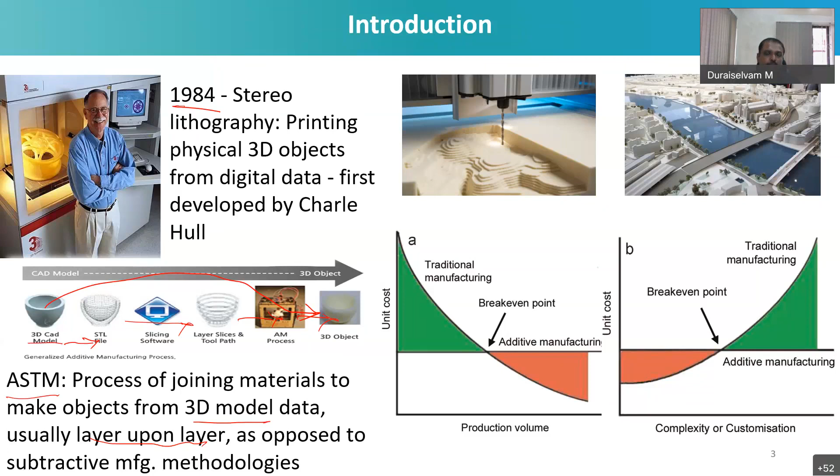And by saying that, you should not take it as a limitation, even though it is a limitation, but still 3D printing plays a vital role in realizing a prototype, and in realizing some kind of batch production. And batch production in the sense only tens or 20s of quantities is required. Beyond that, you may need to have some kind of a design change, and there is not any kind of similarity between the batch you have already processed and the batch you are right now processing. Under these circumstances, definitely mass production may not be a viable solution. Rather, you can go for 3D printing the objects. And it has, in fact, a huge cost advantage.

And when you look at that, the global market for metallic additive manufacturing for aerospace alone was $1.9 billion in 2016, and it is forecast to reach $20.9 billion, almost a 10 times increase projected by 2024 within a very short time, where other manufacturing systems or competing technologies cannot match this kind of speed.

And compare this situation in India again: almost 10 years before, you don't see a lot of industries using 3D printing systems. But in recent times in major cities, they have installed 3D printing systems, and they are serving commercial markets, more specifically automobile and aerospace. And I have also seen some applications for dental and medical, cosmetic related applications and consumer products. A lot of things they started 3D printing in recent times, and slowly the market started flourishing. And once many people started using the system, possibly you can expect a huge price reduction in terms of capital investment, and this becomes one of the important sources of doing business.

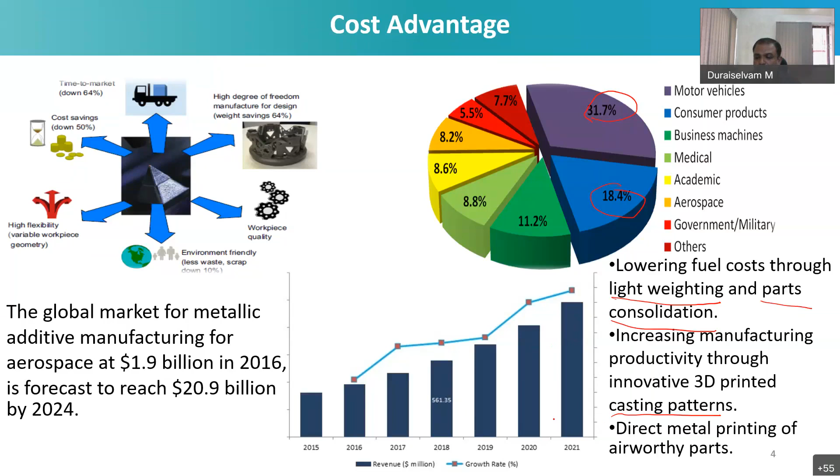Then increasing manufacturing productivity through innovative 3D printed casting patterns. So why not go for pattern production itself rather than using it for a product? Because this is a part of rapid tooling, rapid manufacturing, prototyping, where 3D printing plays a vital role. So beyond that, you can extend the 3D printing capability to rapid tooling also, where you can produce the casting which is required to produce components in mass production. Then direct metal printing of airworthy parts, that is another important thing.

So basically, when you look at any general additive manufacturing textbook or some papers, they made a lot of classifications. They come out with quite an interesting number of classifications. And today in the market, you have thousands of varieties of 3D printers dealing with different technologies. But ultimately, all these varieties can be brought under any of three categories, simply speaking. Just to give a general audience some information, I don't like to confuse them by talking more about multiple varieties like continuous fiber based 3D printing and other methods emerging in recent times. Rather, the base is how we can classify under these three different categories: liquid based, powder based, or solid based. Most 3D printing technologies may ultimately fall into one of these categories, but some may not, though the basics of operation may be similar.

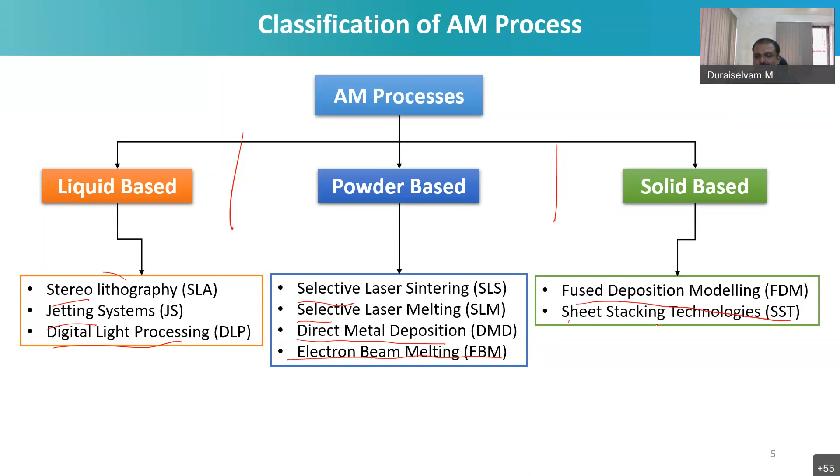Under liquid based, we'll talk about stereolithography, jetting systems, and digital light processing. Under powder based, we can talk about selective laser sintering, selective laser melting, direct metal deposition, and electron beam melting, which is recently coming up. Under solid based, we have fused deposition modeling and sheet stacking technologies. So we will look at each in brief, and when you want elaborate information, you can refer to any standard textbook, or browse the net, where you have a better possibility to understand in depth the process characteristics and other related things.

So stereolithography is basically a kind of curing technology, right? It is one of the base AM processes. As I said earlier, in 1984, Charles Hull used this process to 3D print some of the models, and stereolithography is the forefather of the 3D printing systems.

And here you'll be having some kind of photopolymer. Photopolymer is nothing but liquid thermoset resin, and being a thermoset resin, essentially it will become solid when it is exposed to some kind of light source, basically the ultraviolet laser light. So when the ultraviolet laser light is passed over that thermoset polymer, the photopolymer, the resin, what happens? It will become solidified. So the intensity or the depth of solidification depends upon the power intensity of the ultraviolet laser that is being passed on.

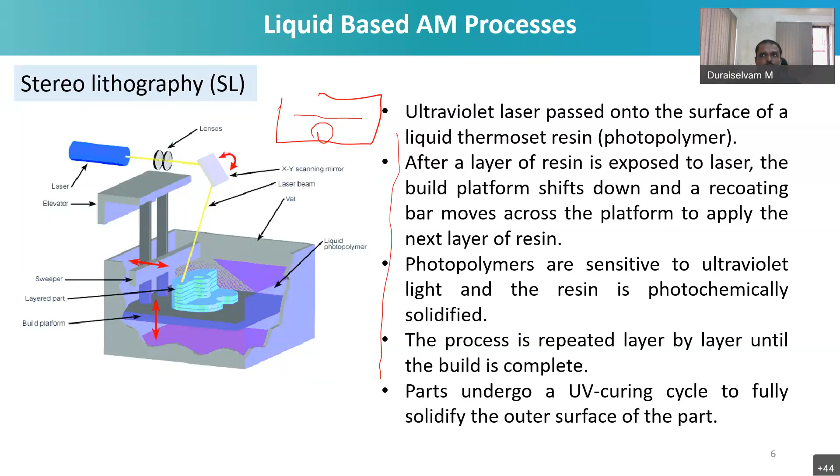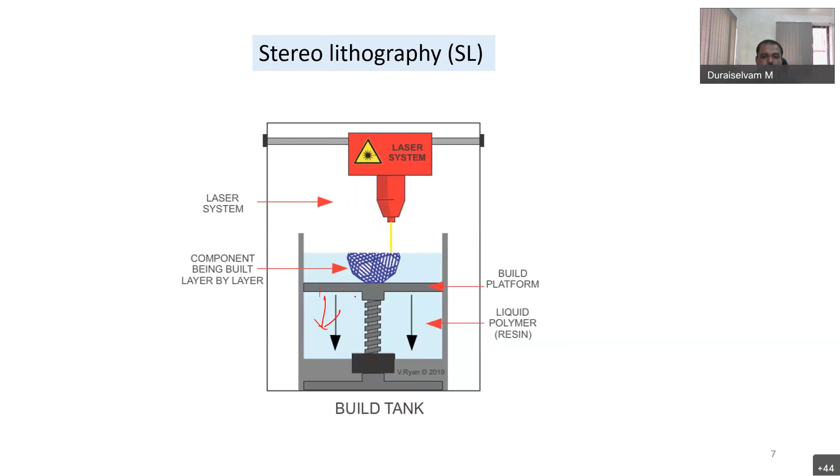So finally, some kind of curing process is also done in order to realize the entire solid material. So that's what's shown here. You can see that there is a kind of chamber in which you have a liquid photoresist polymer or resin, and the laser is passed wherever you want to solidify or realize solid material. Then you are lowering this platform one layer thickness, and then the laser follows the path, and ultimately at the end you have one finished product or a prototype.

In the jetting system, almost the same principle of photopolymer is used. Again, here we are going to use a thermoset photopolymer or resin, and rather than having a resin bath or resin chamber, here, as we have seen in an inkjet printer, it is put in drop by drop. So that is the only difference, right? So drop by drop, wherever you require the part, you put it in the form of a droplet, and immediately the droplet will get cured by the UV curing light, and then the platform is moved again to one position. And here there is a possibility to have two different heads, one head for the primary material supply and another head for the supporting material.

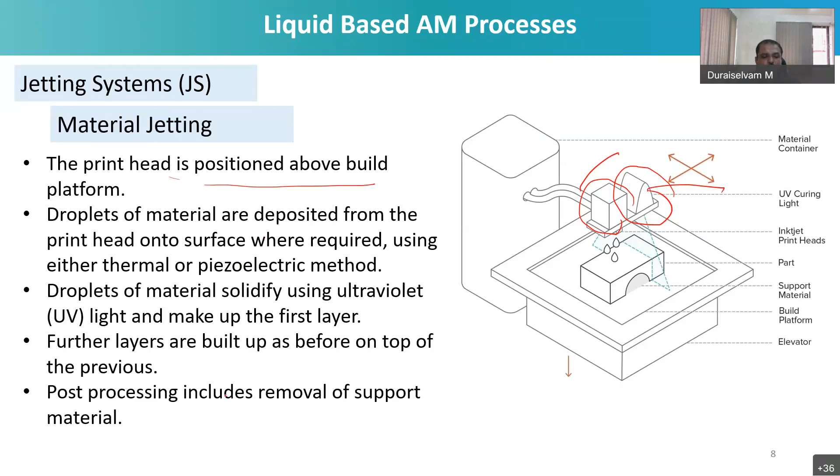So likewise, you are building layer by layer, and the droplets fall wherever you want to realize the solid material. So here the print head is positioned above the build platform, and the droplets of material are deposited from the printing head onto the surface where required, using either a thermal or piezoelectric method. Thermal is the system where you slightly melt the polymer material, and then it becomes liquefied and falls as a droplet. So the droplets of material solidify using ultraviolet light and make up the first layer. Further layers are built up as before on top of the previous. Post-processing does removal of support material. So likewise, you can build the system.

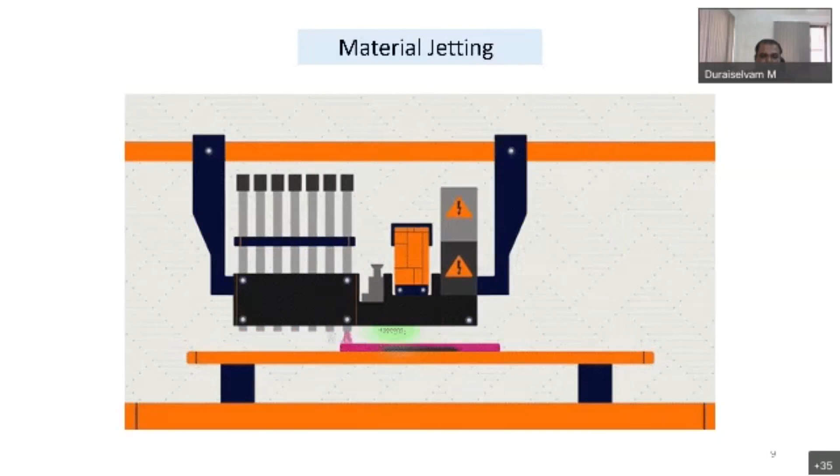So here you can see that the droplets are falling on the material wherever it's required, and in parallel the supporting material is also falling, and you have a laser system here to cure, and then finally you can realize this particular product. And binder jetting is another form of jetting system, and rather than having some kind of curing system, here no such systems are involved. Rather, you have a kind of liquid binder to bind the powder together, right?

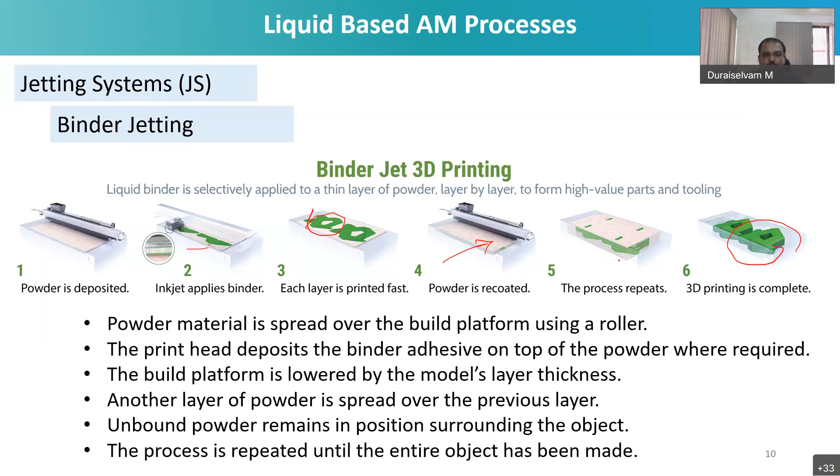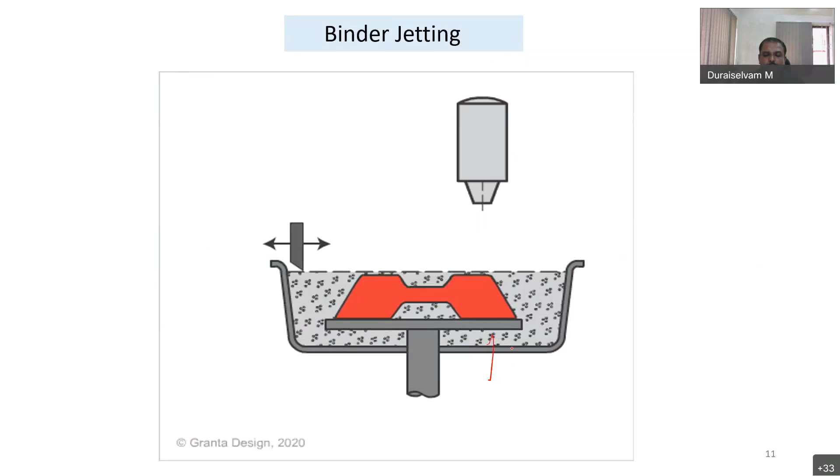So you can see the process. It's depositing powder wherever it's required, and then the binder is applied, and the table moves one step downwards in order to build the entire workpiece or component you intend to build.

And digital light processing is a little innovative process, and one of the fastest processes in the 3D printing arena, where you can realize the product at a very fast rate, as the curing rate is also extremely high. In most situations, you pass the curing media or a laser light or a binder from the top. This is completely from the bottom. So you start building from the bottom, and you normally have a resin tank here, and there is a kind of digital micromirror device.

So this is a very critical system in digital light processing, a digital micromirror, and it's a component made of thousands of micromirrors used for navigating the light being projected by the digital light projector. So you have a light source, and this light is used to cure the system, and it falls on the digital micromirrors. Then it gets focused, and then it goes to the tank area, where the bottom of the tank is transparent. It falls according to the curing strategy, what you want to cure and what you don't want to cure.

And from the build platform in the Z axis, it will get attached to the surface. Then slowly, when you are moving in the upper direction, you can build any component you want according to the light reflections you already planned. So this is one of the fastest processes, as I said earlier, and you can realize any kind of complex shapes using this digital light processing system.

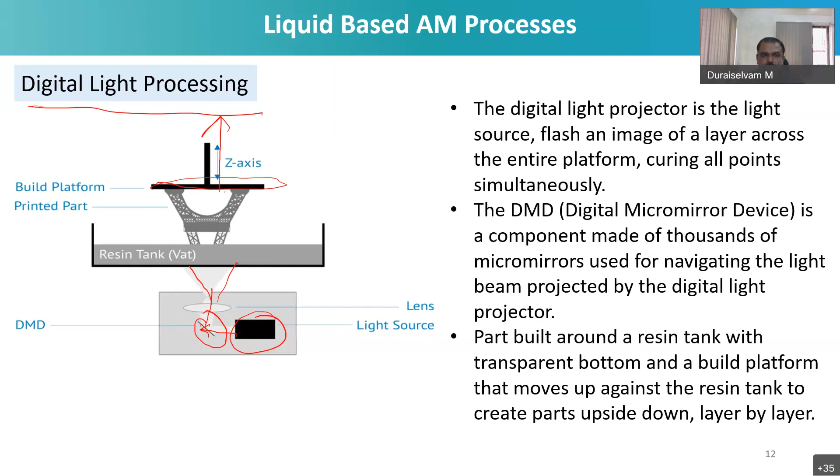And coming to powder-based additive manufacturing processes: in the earlier case, liquid-based, the starting material is in the form of liquid. So from the liquid, you are using some kind of strategy to cure the liquid into a solid form. But in the case of powder-based AM processes, the starting material is preferably in the form of a powder, right? So powder can be a composite powder or a polymer powder or a metal powder when you are talking about metal-based 3D processes.

So there is a little difference between selective laser sintering and selective laser melting. Most metal additive manufacturing systems fall under the category of SLM. SLM is selective laser melting. So you need to melt the metal powder in order to fuse it together to form a solid layer, and finally a product. And if you want to use some kind of pre-bound polymer or a ceramic or a glass particle, and just fuse the material using the laser energy, then it is more of a selective laser sintering. You are not raising the temperature to the melting point of the material, rather you are just sintering it. So sintering finally will get it fused, and just for realizing the prototype, you don't need a complete melting or solidification.

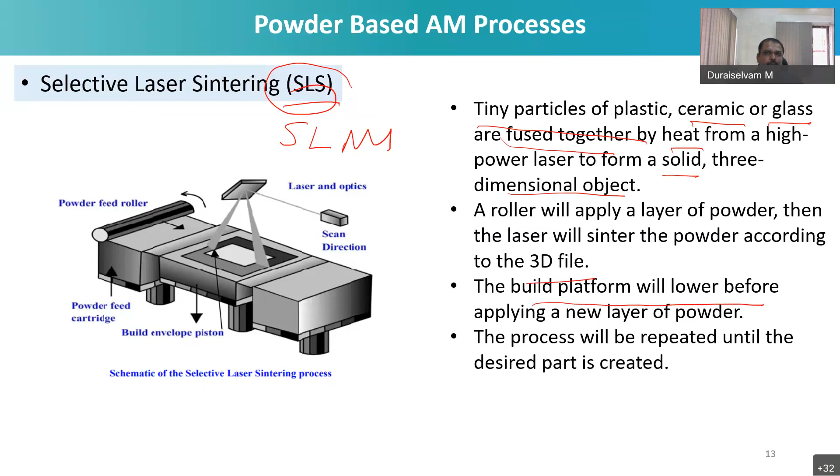And after doing that, a roller will apply a layer of powder. Then the laser will sinter the powder according to the 3D file, and the build platform will lower before applying a new layer of powder. So basically, again, it is a layer by layer deposition of the powder particle. Sintering happens, lower the powder bed by one layer thickness, then again apply the powder, lower the layer by one layer thickness, likewise it goes.

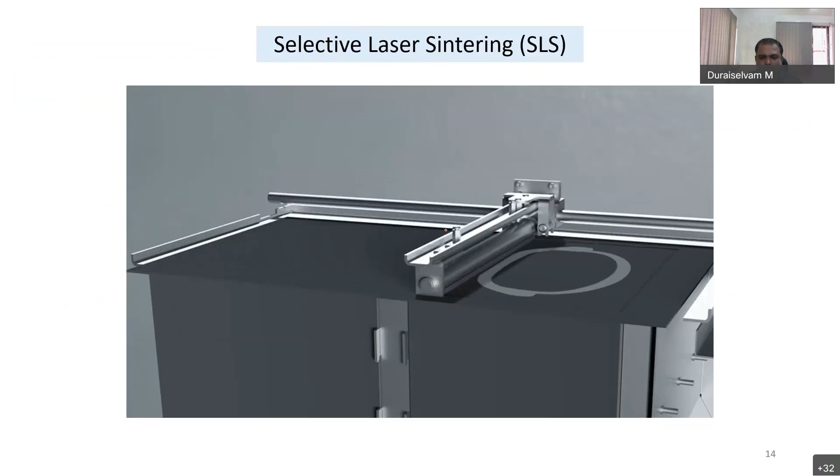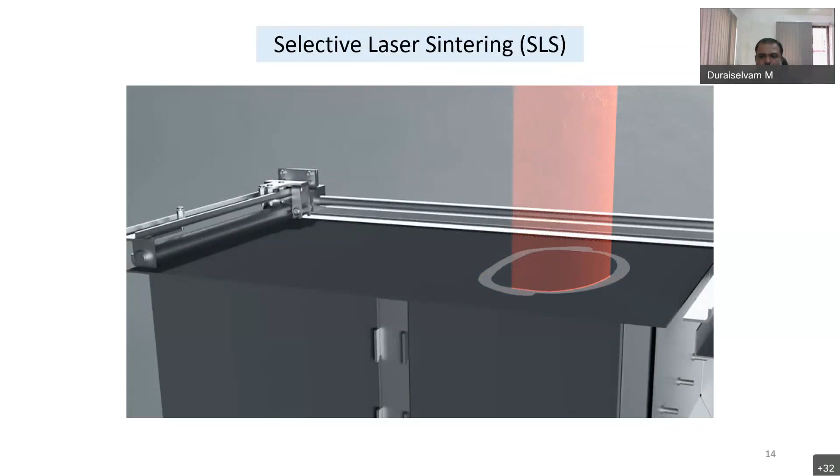So here you can see the selective sintering process: they are applying one layer of material, and the laser is sintering selectively where you wanted to realize some kind of a solid, then again it is falling on that one, and the process repeats until you build the entire component.

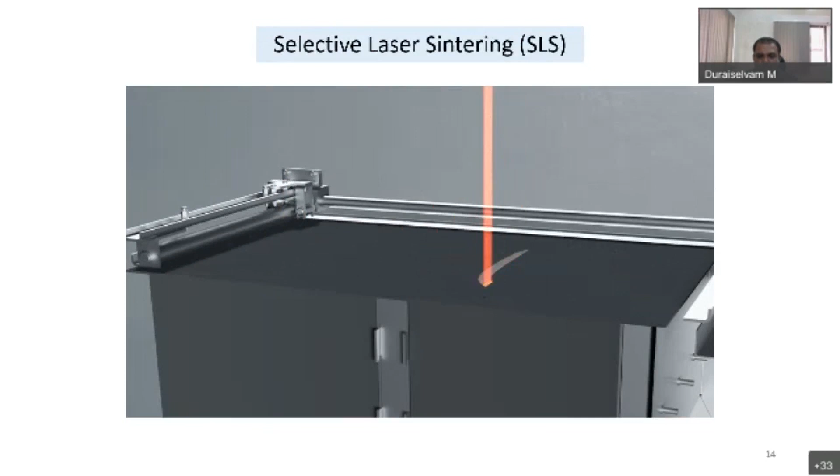And selective laser melting is a more straightforward process. You completely melt the metal powder that is lying on the bed wherever you wanted to realize the product, and then you lower the bed again and repeat the process to finally realize the entire component. That is selective laser melting. And there are a lot of other names also being used: direct metal laser melting, or laser powder bed fusion technology, or simply powder bed fusion technology.

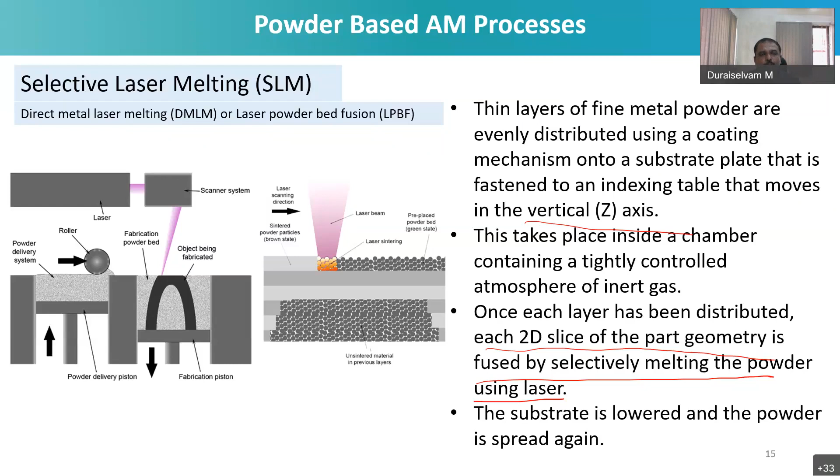product. So once each layer has been distributed, each 2D slice of the part geometry is fused by selectively melting the powder using a laser. Basically, these 3D printing systems will cover only a 2D area in the X and Y direction. And since you are lowering one by one and fusing the powder in the Z direction, finally you can realize the entire component in a 3-dimensional pattern.

And direct metal deposition is more like laser cladding, right? And if you have a coaxial powder feeding nozzle like this, whether it is a lateral or off-axis system or a continuous coaxial system, you have some kind of a powder feeding mechanism where the powder is fed into the coaxial nozzle of the laser, and the laser light will come from the middle, and then it melts the material which is meeting the already prepared layer, and then it will get deposited.

So likewise, if you mount the entire coaxial nozzle like this on a robot arm or a kind of XY gantry, and if you move that entire system in a pre-programmed manner, then finally you end up producing the entire product. Some industries have even proved they can build an entire turbine blade using this direct metal deposition based technology. So here heat is generated using a focused laser beam that is sufficient to melt the surface of the substrate to form a small melt pool, and the material is added to the melt pool using a focused powder stream or a wire feed.

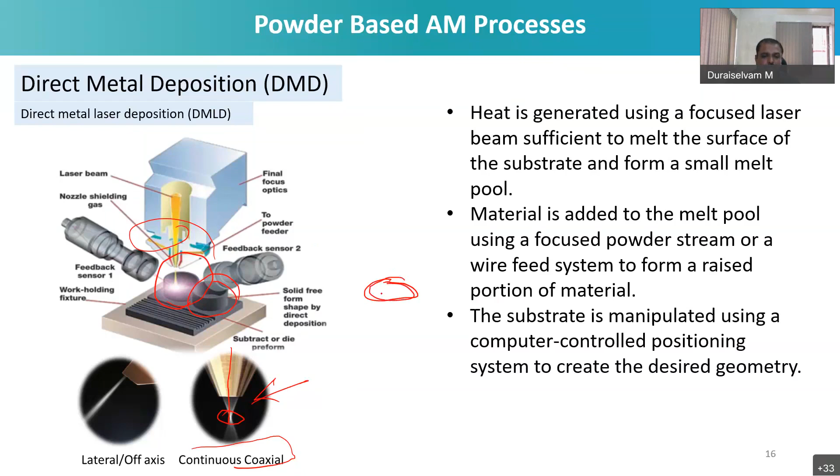Here rather than using a powder, you can use a wire feeding system also, and you can manipulate the substrate like that. Here you can see that you build a kind of cylindrical material one by one, layer by layer, and you can realize the final product. So likewise, you form one layer over another like this continuously, and you can build the entire material for the system.

And electron beam melting: the process execution strategy is almost similar to laser-based powder bed fusion technology, except that rather than using a laser for melting the powder, they are using an electron beam to melt the powder. The only advantage they expect from electron beam based systems is that the distortion levels are very, very low, because the electron beam is not a very high intensity heating system, whereas the electromagnetic radiation in the case of a laser has a huge heat content that will try to distort in certain situations.

Normally, if you print using laser based systems, that will lead to some kind of tensile residual stresses inside. You need some kind of stress relieving strategy before using it for a final product; except for that, all other processes are similar. And the electron beam system, in fact, does have a lot of difficulties in terms of beam manipulation. When you want to deflect the beam, you need to have some kind of magnetic deflection coil. But with the laser being electromagnetic radiation, you can simply move the beam by moving the mechanical system.

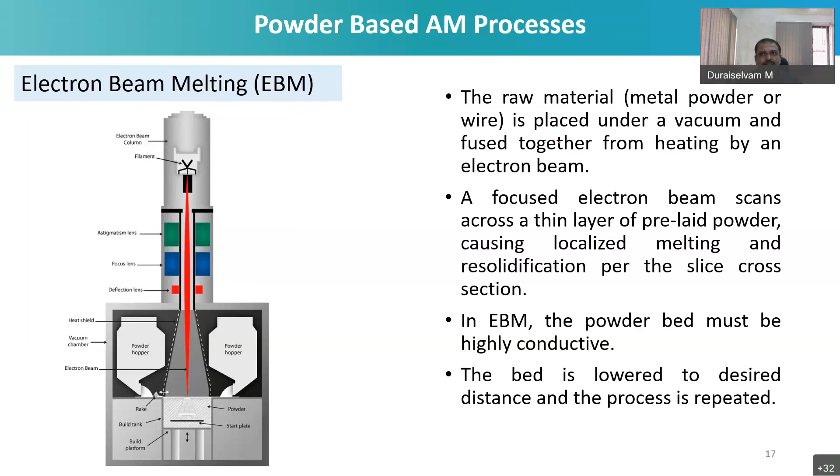So this kind of disadvantage still exists, but due to the advantage of low distortion, electron beam based systems are nowadays also picking up in the market. Here you can see the powder feeding chamber, and you have an electron gun here, a triode, which is melting wherever you want to realize the solid part. Then there is a recoater which removes the excess deposited material, then the electron beam is used to melt the material, and finally you can realize the finished product.

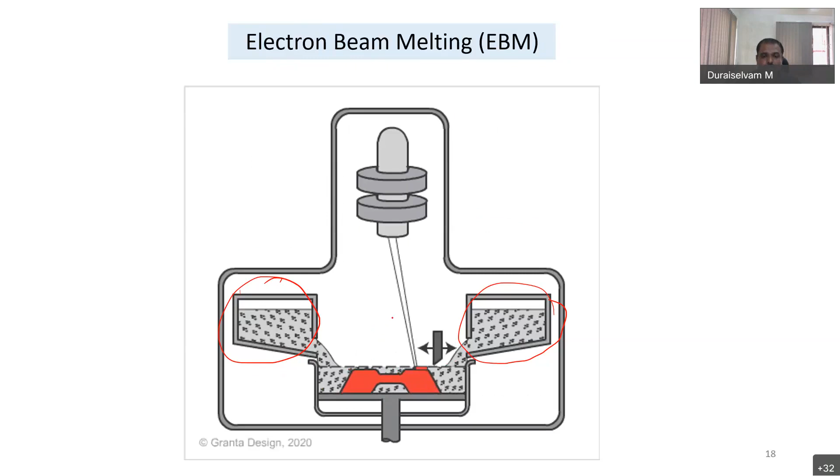So here is some comparison between electron beam and laser based 3D printing technology. Most of the things are self-explanatory, and probably in any of the textbooks you will be able to see this kind of comparison.

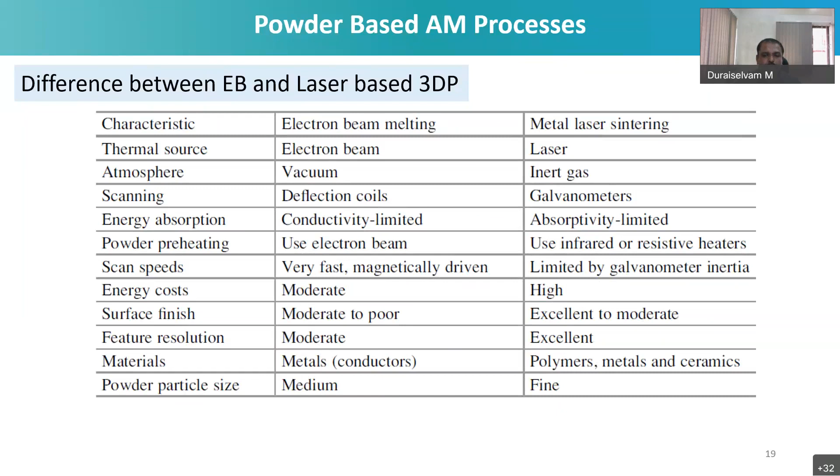Coming to solid based: in an earlier case we used liquid as a starting material. Then in a laser based system, predominantly we used either a powder or a wire. And here in solid based, they will be using purely a wire as a starting material, a kind of filament coil, and this is fused deposition modeling. We even have one FDM printer.

FDM is a widely accepted process, where you have the material in the form of a wire, and the wire is fed through a kind of extrusion head, and in the extrusion head you have a kind of heating coil. The coil will heat up the material, and then it will deposit wherever you want to deposit. Mostly the extrusion head will be moving in the XY direction, and the platform will move down in the Z direction.

Here you can see that there are two different colors. One is dark blue, another one is light blue. The dark blue is the part, and the light blue is the part support. Both can be fed simultaneously using the extrusion head, and at a time it can deposit only one, depending upon the part geometry.

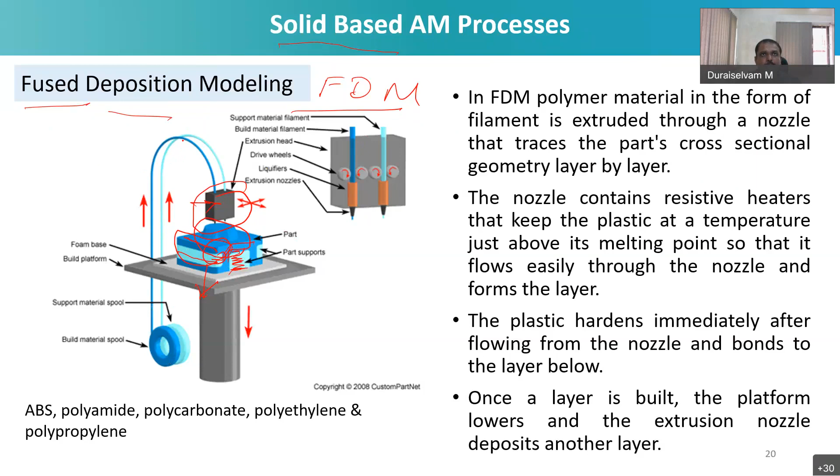So finally, you end up generating any kind of part using this particular technology. It's fused deposition because you are melting and fusing, hence the name fused deposition modeling. You can see that there is a wire feeding spool, and mostly these are all thermoplastic materials. The thermoplastic material is fed into the system, and using the heated head, it will melt and fuse layer by layer, and then the platform is lowered one layer to realize the final product.

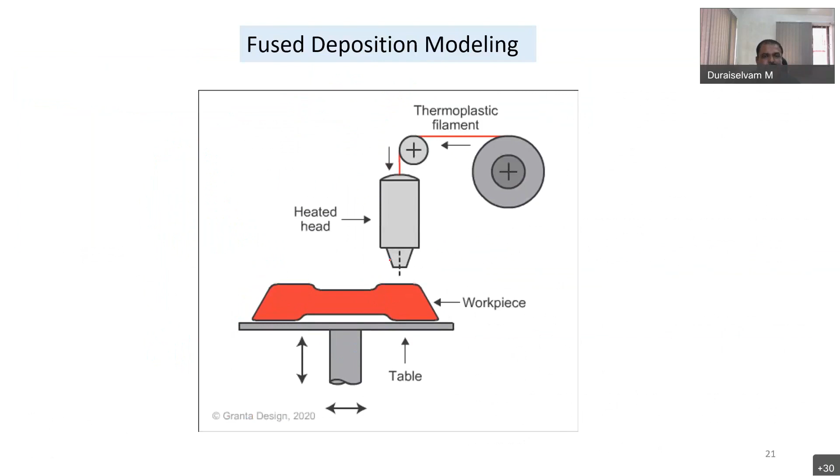Laminated object manufacturing is again a kind of technology where they use a solid-based material, the starting material preferably in the form of a sheet. And you need two components. One is sheet, another one is binder. And a laser beam is used to cure the binding material as well as to cut the excess material.

And there is a heated roller that is being used to fuse the material together, almost similar to our certificate lamination process, where you put a paper and above that one bottom and one top layer of polymer material that is heated up and then it is fused together.

So here the sheet is adhering to the substrate with a heated roller, and the laser traces the desired dimensions of the prototype, and the laser cross hatches the non-part area to facilitate waste removal. So this is the part area, and the rest of the area is non-part area. So you can cross hatch so that it can be removed easily.

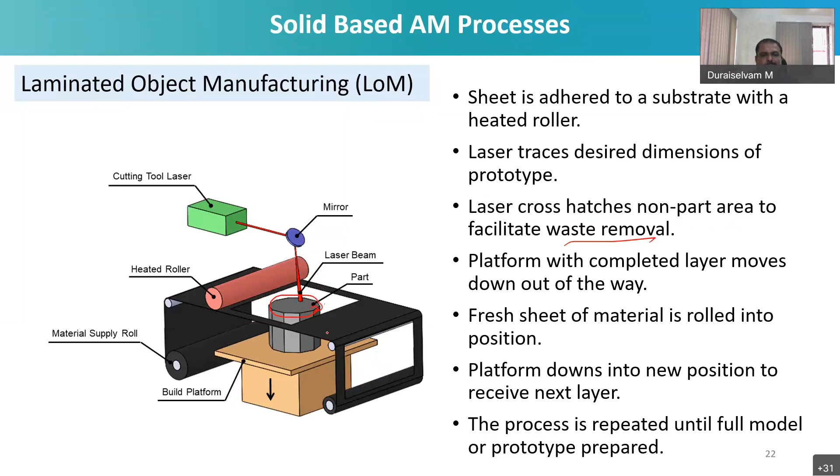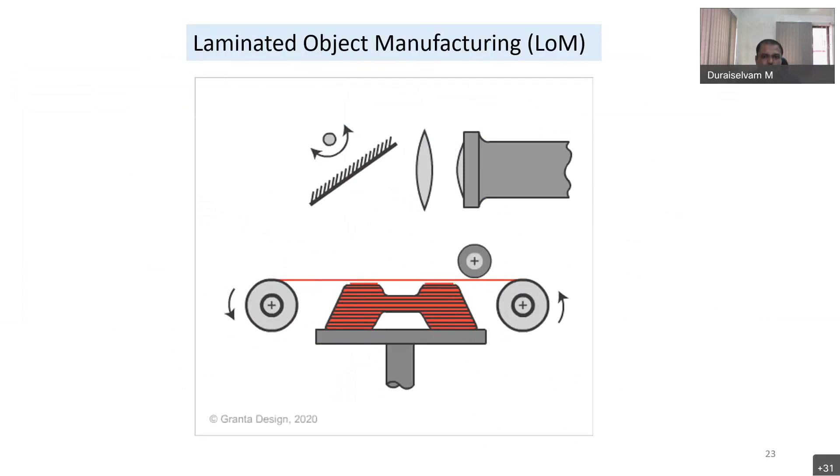Again, the roller makes one movement, and then the heated roller also rolls over the surface. Likewise, the process repeats to realize the final product. So that is about the laminated object manufacturing. So this is very brief information about the classification of additive manufacturing systems: either liquid based, powder based, or solid based.

And we look at some of the applications in different verticals. Aerospace, where some of the components are very unique. Some of the components need a lot of improvement in terms of reliability, and you don't need some products in bulk, and some of the parts where you can better improve the performance. So under these cases, the aerospace industry's demand for additive manufacturing systems is ever rising.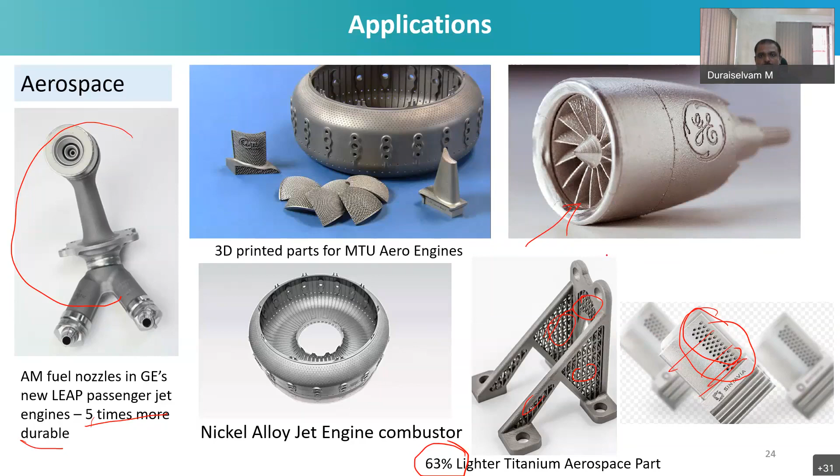And this is one prototype of GE, where they have printed the entire turbine, a working assembly itself. And they proved that it is possible to print the entire turbine with complete integration of all the different stages, and it's ready for use, a kind of system which is very futuristic, and such a system is highly demanded in industries in recent times.

And in medical, you have a lot of interesting applications coming in. One of the major applications is printing implants. Implant printing is very, very demanding in the medical industry, as most of the requirements for implants are unique. No two human beings have the same kind of bone structure; even though the skeletal topography or the dimensions will be the same, there will be a lot of difference in terms of the appearance, in terms of the kind of system available with every human being.

So when you want to prepare an implant, just a kind of rod to treat an orthopedic kind of injury, then no problem. But a hip replacement or a dental implant needs to be produced uniquely for the patient. In such circumstances, you use a scanning system to exactly map the dimensions of the particular patient. Then that can be imported into a 3D model, and finally realized in the form of a 3D printed product.

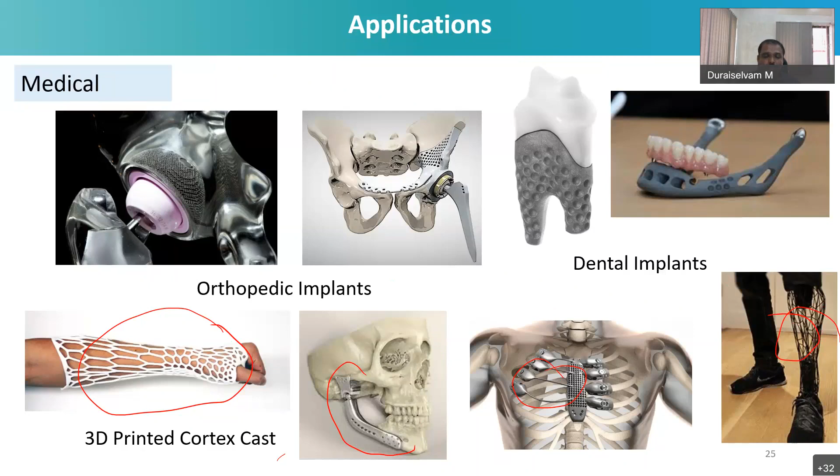So here you can see some orthopedic implants and dental implants, and the 3D printed cortex cast. Earlier, we may have used plaster of Paris whenever we wanted to heal a broken bone. But nowadays, without losing the strength, and with a lot of aesthetic look, you can prepare this kind of cortex to cure broken bones, and a jaw implant, the ribs of the bone, or even prosthetic implants, very, very lightweight. Here you can see it's a kind of network structure, simply connected with wires or something, but it has huge strength.

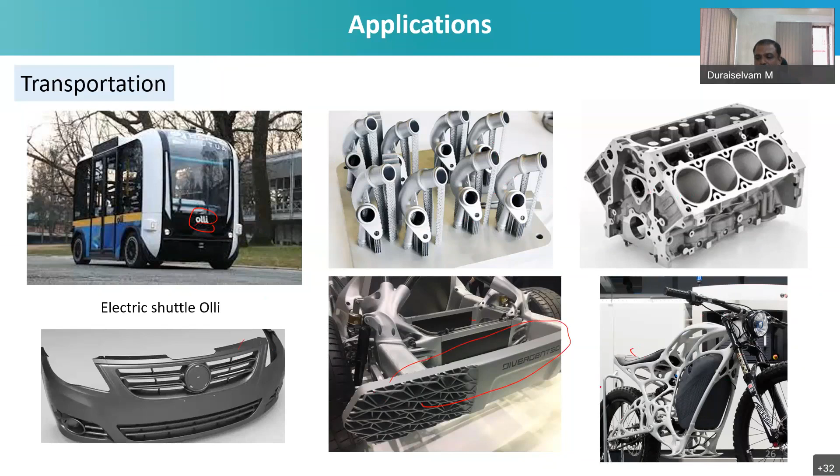In transportation, you have a lot of interesting applications. Here it is an electric shuttle, OLLI. It's completely 3D printed, a demonstration of an e-vehicle that is printed completely. And this is another demonstration of mass production, batch production, where you can produce a number of systems with complicated curves, flanges, everything together you can print. You can even print an engine block, a front panel, or even an entire chassis of a bike; something like that you can innovatively think about.

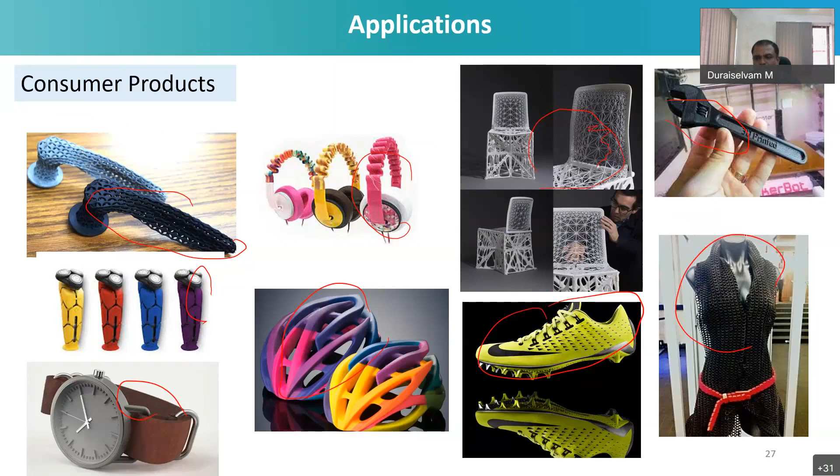And depending upon the size of your head, you can print the helmet, because sometimes we sacrifice on sizes and go with some closely matching size. But with 3D printing, you can print exactly your head size. Similarly, with 3D printed shoes, you can print exactly your foot size. When you go to a chappal shop or a footwear shop, you have numbers like 6, 7, 8. If your foot dimension is 6.5, you need to go for 7. If it is 7.1, you need to go with either 7 or 8. So you have to make some kind of sacrifice. Rather, you can print the shoe to exactly match your requirement. And 3D printed clothes are also coming up according to your needs.

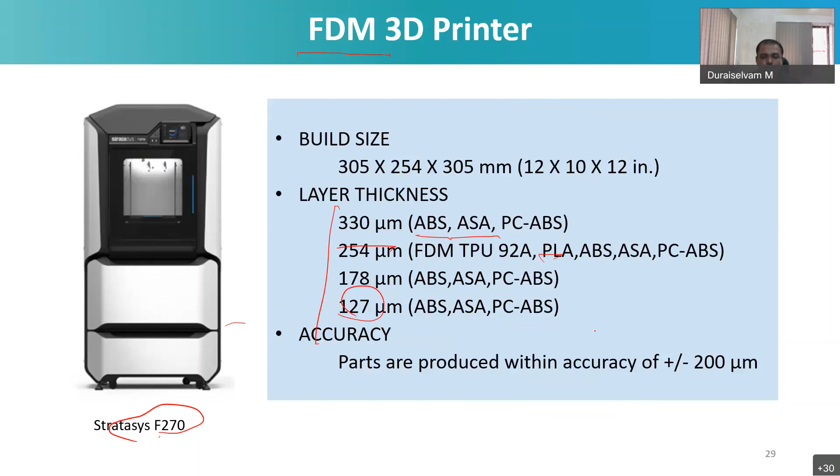And the accuracy of part production is plus or minus 200 microns. And these are some of the 3D printed parts that we have done using our FDM printer.

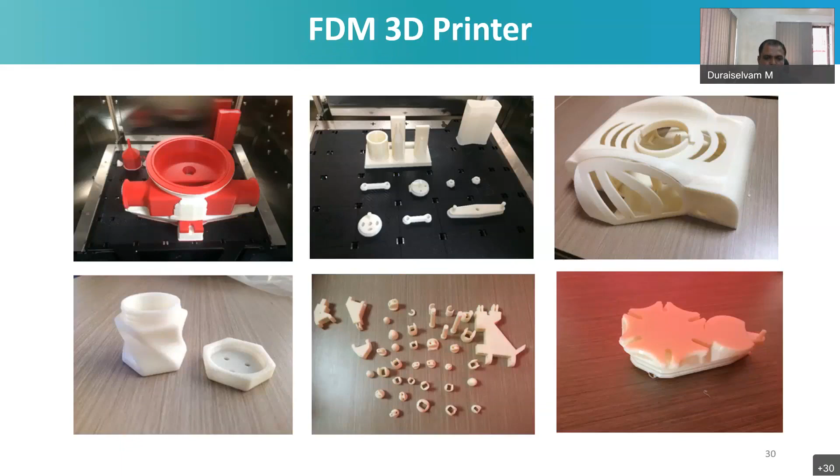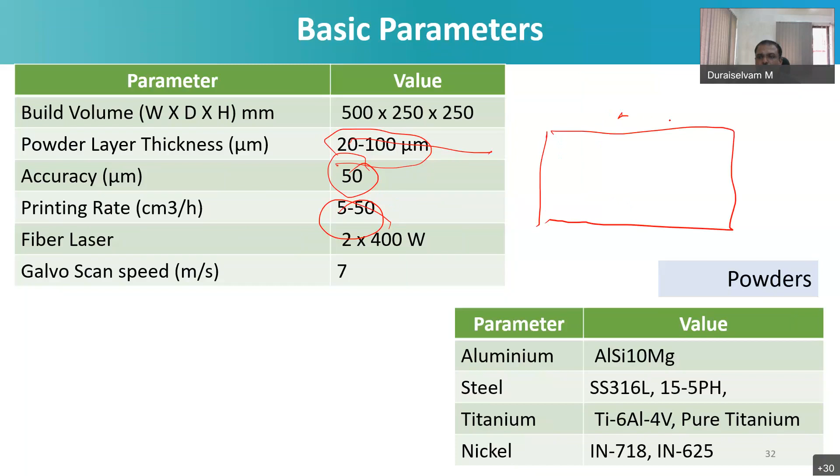And actually it's a twin laser system. Why we went for a twin laser system is the productivity can be entirely doubled. For example, when you look here, this is the build platform, and this is 500 mm, and this 500 mm is divided into 2 portions, and one laser will cover this portion and another laser will cover this portion. And if you have a big part covering the entire build area, both the lasers will simultaneously operate and print the entire part.

And if you have a number of small parts, some parts you can locate here, some parts you can locate here, so that you can simultaneously print in order to save printing time, because most of the time the printing speeds are very slow, and you need to use this kind of strategy in order to improve the printing capability.

And basically, the movement of the laser beam is controlled by galvo scanning, and you can go up to 7 meters per second. It's fixed actually. It's a fiber laser system, twin laser. And multiple materials are possible with our printer.

For aluminum alloy, we have aluminum silicon 10 magnesium. Steel, we have 316L and 15-5 PH. Titanium, the titanium grade 5, it's a medical grade actually, titanium 6 aluminum 4 vanadium, and we have pure titanium also. And under the Inconel alloys, we have Inconel 718 and Inconel 625. These are the multiple materials that are possible right now.

And we can go with any kind of material, but the only thing is we need to get the parameters from the OEM, because developing the parameters by ourselves is too complicated. We don't know, at a particular layer thickness, what kind of melting the laser is doing, how it is hatching the entire pattern, and how it is using the power to reach the contours. All those things need a lot of critical understanding. So we normally depend on the OEMs to supply the parameters.

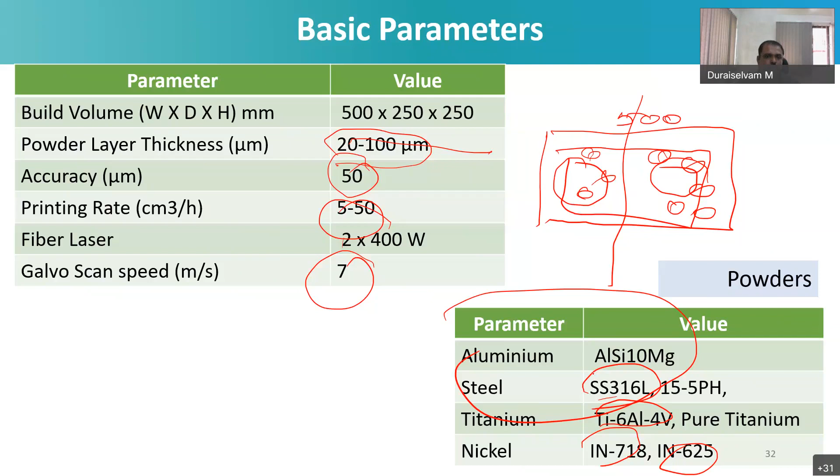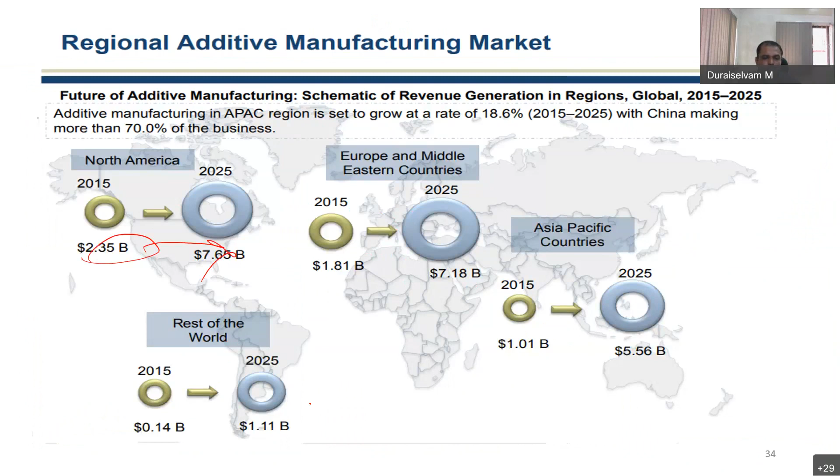So the regional additive manufacturing market in North America is projected to increase from $2.35 billion to $7.65 billion over a 10-year period by 2025. In Europe, it is 1.8 to 7. In Asia Pacific, it's 1 to 5.6, and the rest of the world 0.1 to 1.1. You can see the enormous projection for how the 3D printing market is going to evolve in the near future. And there are a lot of key challenges that we are facing in getting the right product from a 3D printing system.

So printing a part with the right shape, because little distortion will be there, and what is the kind of allowance that you need to give in order to get the exact shape, and what is the kind of post-processing requirement, that's all a big question.

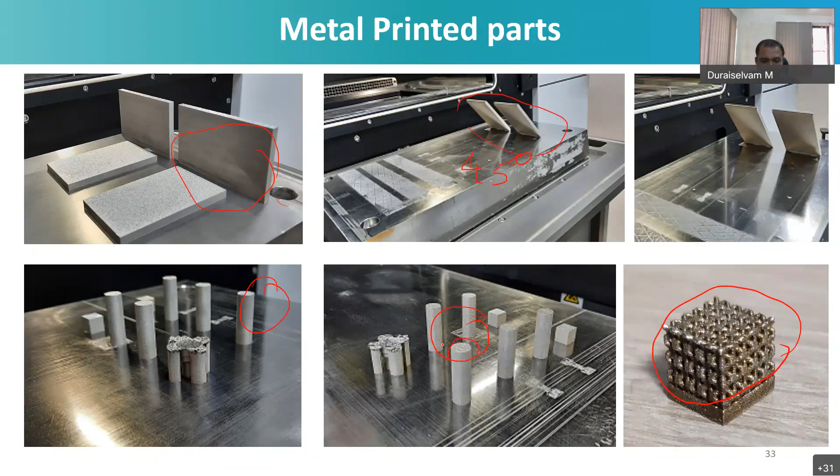And ensuring part qualification, as I said earlier: distortion, shrinkage, porosity, delamination of layers, surface finish. Normally it is poor here, because you are converting the powders into a molten material, and during molten pool solidification, some kind of ripples will form. Even when you look here very closely, you have some kind of rough surfaces. So definitely it needs a kind of post-processing, a kind of machining is required. So how to overcome that is very critical.

So which raw materials and machines for which results? Is it really worth it? That's the $1 million question, but really it's worth it, because rapid prototyping is one of the inevitable sources, and Industry 4.0, again, it's an inevitable source. Some of the complicated, intricate shapes, inevitable source, but for normal manufacturing, definitely going for 3D printing is not a wise decision.

Are operators being put at risk? Obviously, when you're dealing with metal powders, you need to be very careful, because you could inhale the metal powders floating in the atmosphere, so you need to have a proper apparatus when you're within that 3D printing area.

Tracking parts to ensure regulatory compliance. Normally, in mass production, you'll be making some kind of numbers: which batch corresponds to which machine, at what time period the machining happened, so that you can trace back if there is any kind of deviation from the planned process. So whether those kinds of systems can be implemented in the case of a 3D printer.

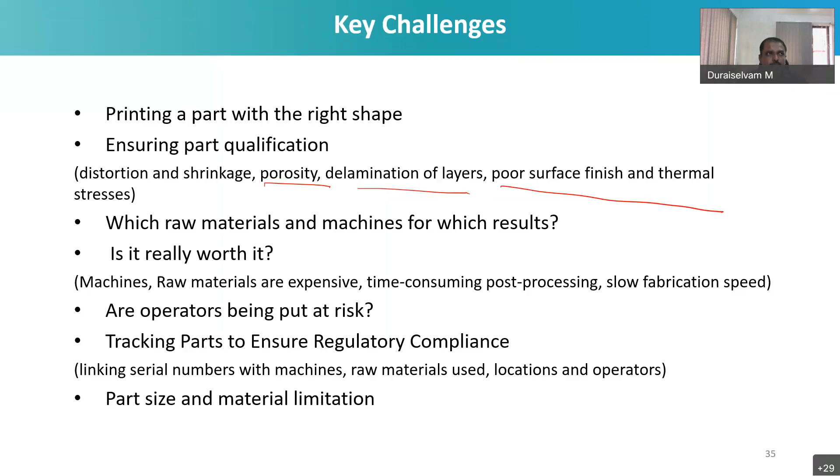And the part size and material limitation, obviously it is there. When you want to print a very big part, you need to have huge printers, and a lot of capital investment is required.

So finally, I will just touch upon the role of additive manufacturing in Industry 4.0. Industry 4.0, you might know, is the fourth industrial revolution. Right now we are talking about starting from 2010. The Germans came out with a kind of industrial revolution or industrial practice, smart manufacturing, which is driving all the industries to think beyond automation. That is what Industry 4.0 is talking about.

So enable rapid manufacturing of new products. Because of the changing markets, you need to produce a lot of new products that need to enter the market. So you need to quickly realign your entire system. Rather than being a rigid manufacturing system, you need to have a completely realigned system.

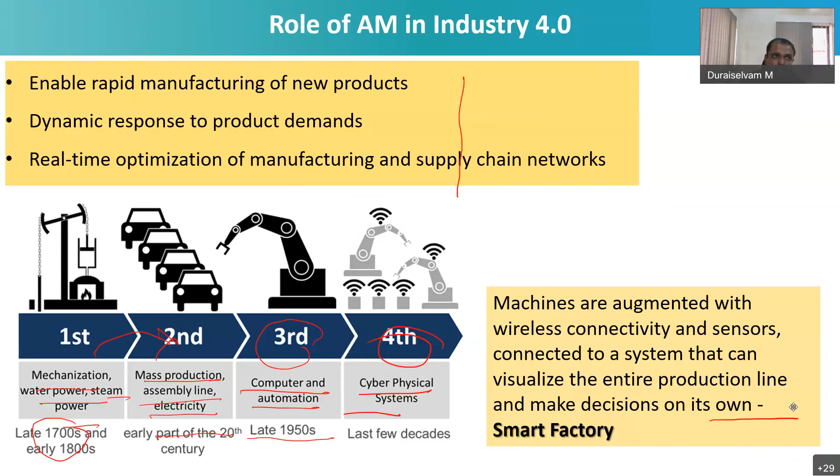So this is a very important and critical point. The decisions are taken on its own, not dependent on any human intervention or input. So that is the way we look at the smart factory, where decisions will be taken automatically based on the data that is being manipulated with artificial intelligence programs.

So this Industry 4.0 is characterized by 4 foundational technologies placed along the value chain. One is the connectivity, data, and computational power. So once we realize 5G, all industries will try to move to Industry 4.0. And this Internet of Things is nothing but a skeleton through which we are building our smart factory. And this Industry 4.0 can also be called the Industrial Internet of Things, IIoT.

So you need a cloud technology to store the data and a blockchain to send the data in a more confidential manner. Then you have the analytical part, that is the second pillar, advanced analytics, data analytics, that is gaining a lot of momentum in recent times, and how to pick up a lot of trends and information from the data you have got. And machine learning, artificial intelligence, all these things are getting in.

And in human machine interaction, you have VR and AR applications quite extensively. Robotics and automation, you have cobots, AGVs, and chatbots. And finally, you have advanced engineering. In advanced engineering, additive manufacturing is becoming a part of Industry 4.0. So again I am telling you, in the near future, when all the industries switch over from Industry 3.0 to 4.0, you will see the usage of 3D printing technology in a more extended manner.

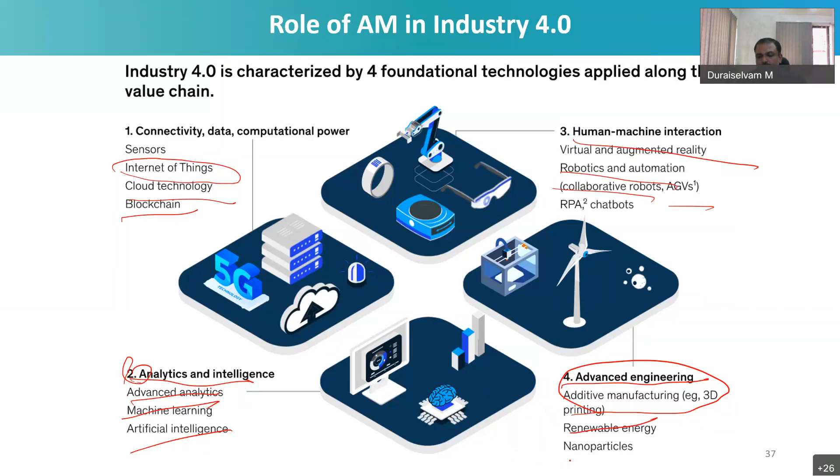Then you talk about renewable energy usage, no more fossil fuels, mostly renewable energy, and something about nanoparticles. So with the short time available, thanks for the opportunity given by the organizers for giving a talk on this particular topic, some introduction to additive manufacturing and how it connects well with Industry 4.0 related concepts.